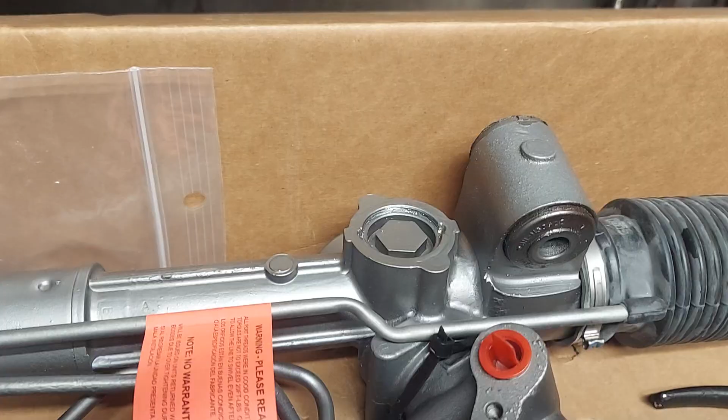This is the store-bought one. That's a cotter pin and cup seals, as I've been told they're called.

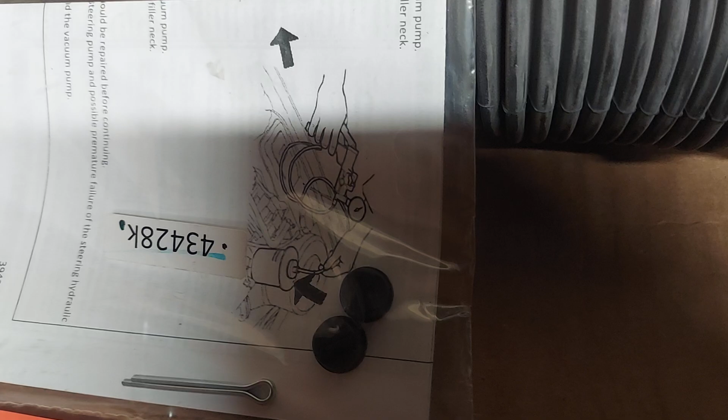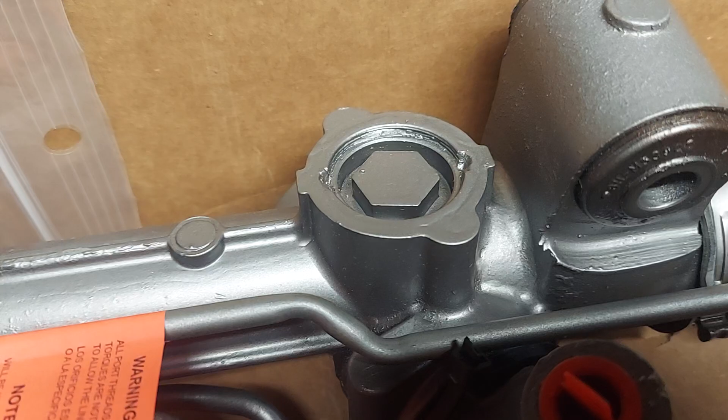I bought a rebuild kit to rebuild the one I took out of my Pontiac G6, and I found out I can't do it. Nope. I'm going to show you why.

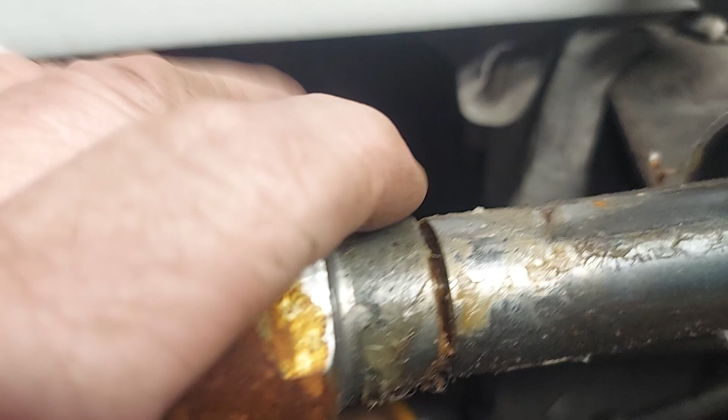Even though I've cut the outer tie rod end off, I'm able to use that on a project later on, so I cut both of them off. But look here, let me see if I can get this set up for you.

See this little indentation? There's one down here too. Okay, sorry about that. That's actually got it crimped to the pinion part of this.

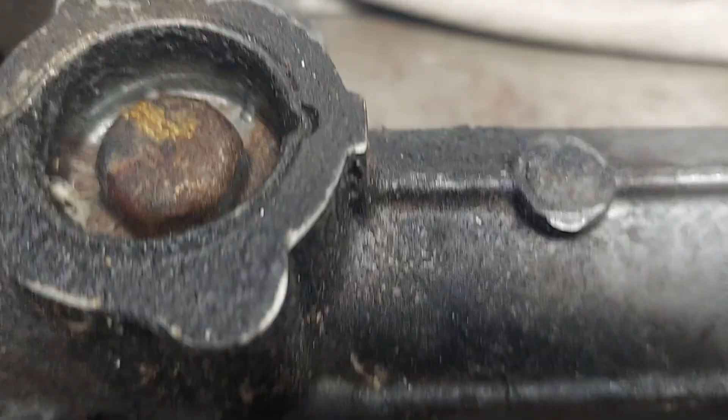Yeah, and down here is the same way, even though it's been turned in. But I can't get this apart. It's dimpled together, so a kit is useless because I can't get it apart. Oh, I could, but I won't be able to use it because I'm going to destroy it doing it.

So that's what I've done, I've just cut these off. Well, tell you what, I stand corrected on myself. For a bigger wrench, they screw off right here. Sorry about that, I misled you, I didn't see that till just now.

Okay, you can't take these off by the looks of it, or you can, but I haven't tried. But since it's dimpled together in numerous places, I can't.

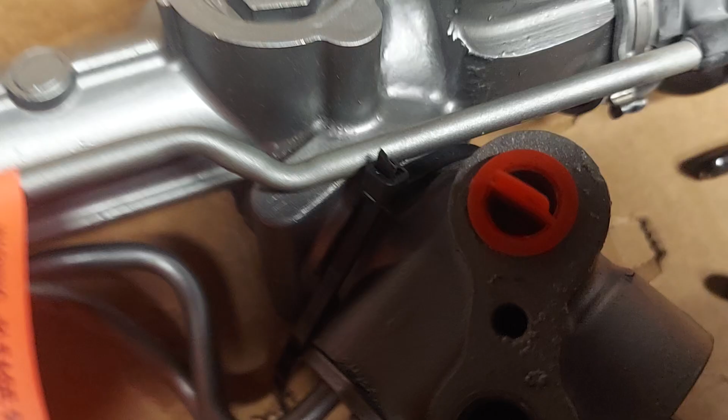If I get the light to it, there we go. Look at the size of that hole. Now here's what come out of that hole: a plug and an O-ring.

But my lines don't fit that. No, they don't. So I had to juggle around, figure out what I've got to do, what I got to change out. So I come to find out what they call a cup seal.

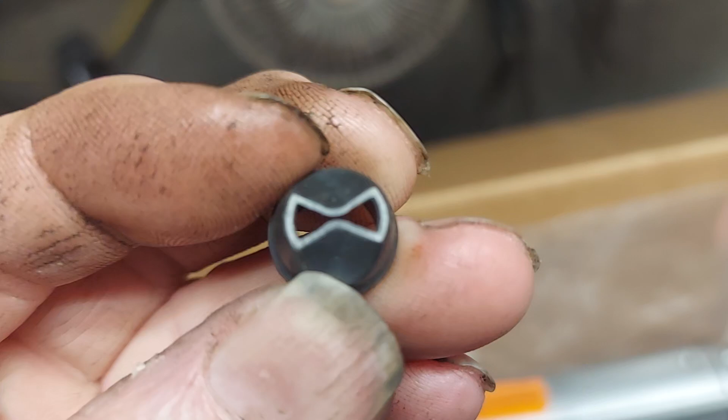Yep, I'm just trying this for the first time. Oh, look at that. No one tells you about this change. Some with O-rings, some O-ring and cup seal, some with cup seal, no O-ring.

Go figure, and this is a reman. You're just backwards, upside down. It's remanufactured. One more time here.

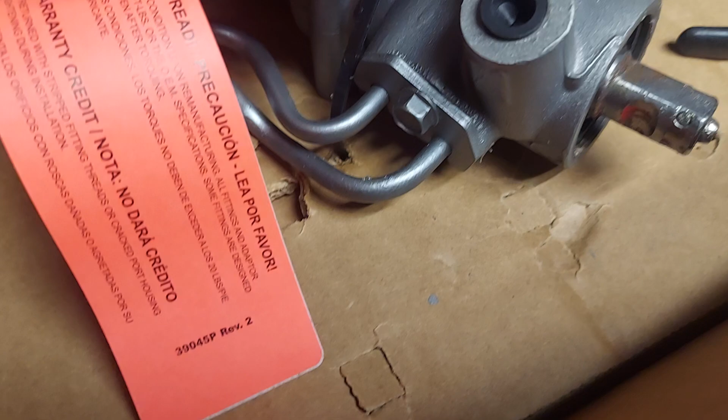But see, that ridge right there has got to go down in there far enough so that plate that holds these lines on goes flush with this. Yeah.

And as you can see, there's a lip there, and it is really, really super, super tight to work with this in the car. 10 mil, 12 point, and it is a very tedious job.

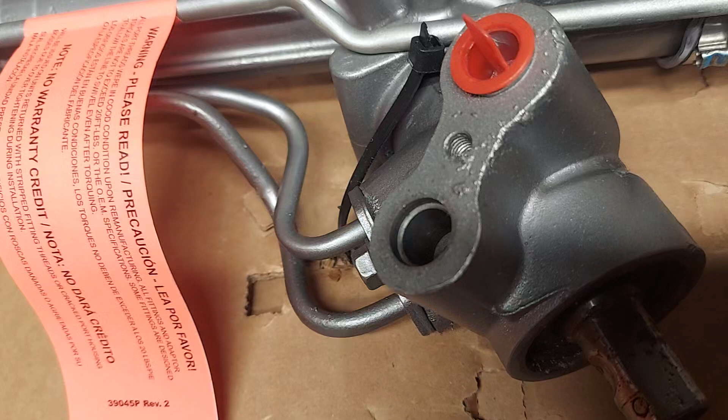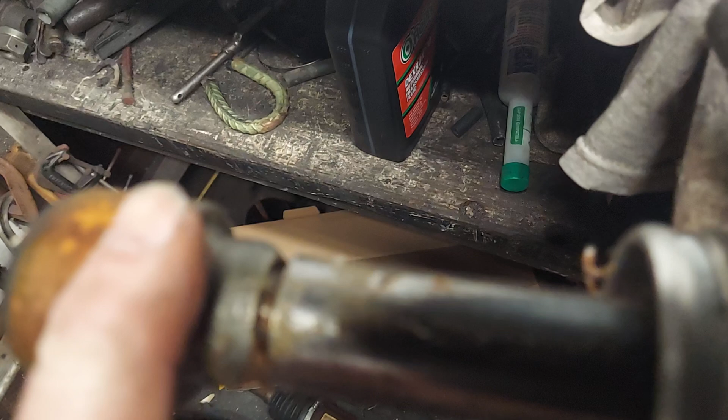Now, I'm going to say these come off. Like I said, I haven't tried it, but I'm not going to fool with it now. I can't rebuild it, like I said, to reiterate, it is dimpled in numerous places.

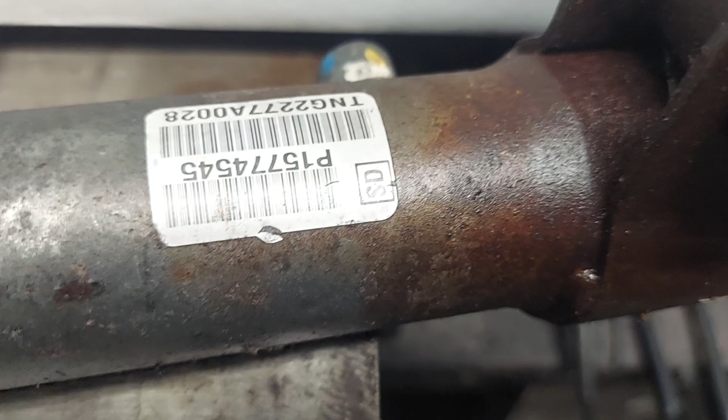And it had to cost a fortune at a dealership. Everything, that's the last place you want to go. Hold on, just give me a sec.

Okay, here's one of the power steering lines, and you got what I would call an installation tool. You got a cup seal, but yet the OEM unit is O-ring.

And in case you do need a part, there's the number, there's your info, for the rack and pinion. And for the high pressure line, here's some info on that.

Turn over, you can read it. Get out in the light.

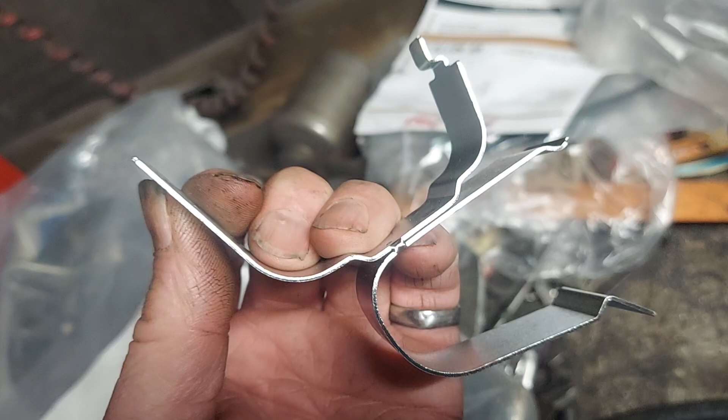And a bracket. And let's see, which way would that go? Whoop, hold on a second. Okay, AC, got it. Yeah, that's my AC. And there it shows you how this is done.

It comes with all this. Oh, hold on. Now then, there's the bracket I was telling you about. And the cup seal actually does fit on this. Snug fit, but it fits. And it does work.

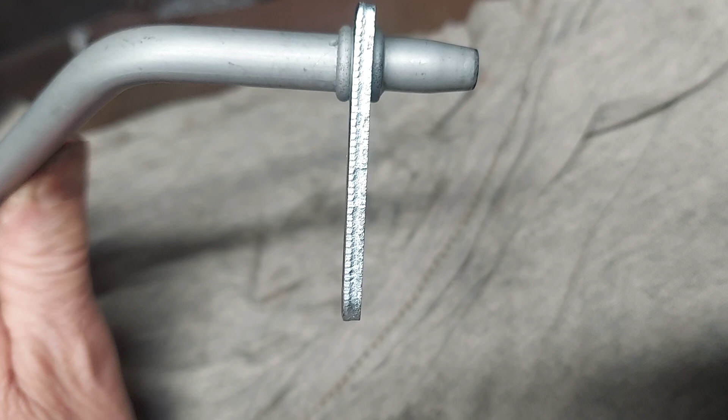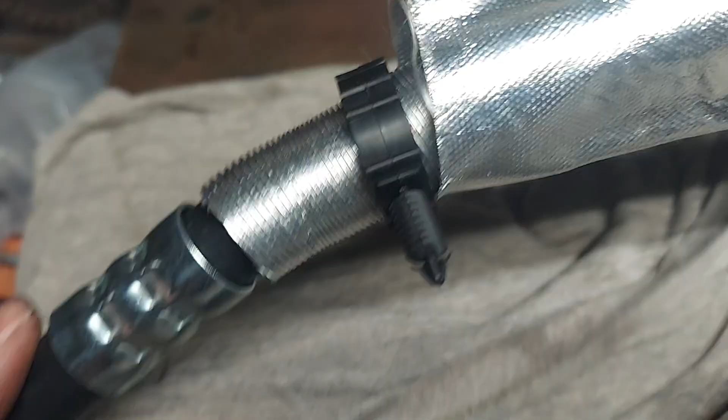And the slot is for the other line. That's just heat tape, keeps the exhaust from getting to it. And that's the end that bolts to the goes into the pump.

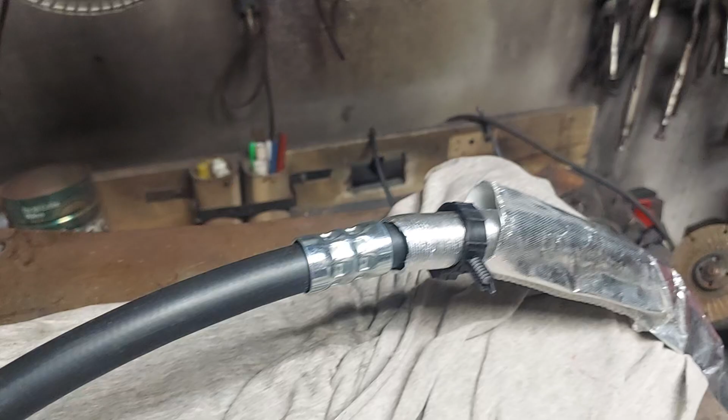So, this is the main reason why I do these videos. It's because parts people can only do so much, and I appreciate all the help they do give me in educating me on the newer stuff. Thumbs up, I appreciate that. But dealerships, car lots, garages, they don't do what they used to do back in my time, back in the 60s and 70s, early 80s, mid 80s.

They'll tell you what's extra on the vehicle that you would need to know, or to bring it to them so you can help diagnose the problem, or they know what you're talking about, and then they go ahead and do what they need to do. But they don't tell us.